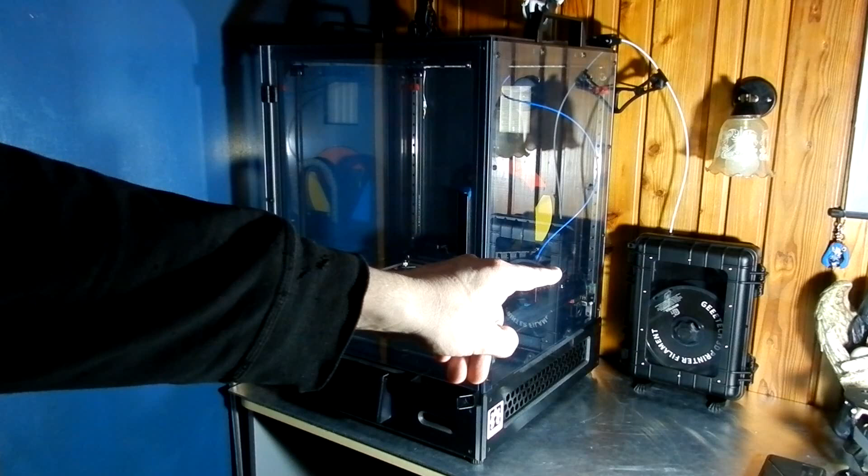So I just want to do an update on my printer and some things that I've changed on it and added to it. I have done about 1.5 rolls of filament through the machine now and got it going pretty good. Parts coming out to size, and designed that filament case which is sealed and has the tube going up to the top all the way.

A few things that I did was make a cover for the screen. Just clips on using the SD card reader. Because of the brightness of the screen, it only dims so far and it's still too bright. Another thing I did was make a holder for the touchscreen pen, because I just about lost it and threw it out one day.

I have installed extra screws in the sides and down the back and down the bottom, because when I got the machine, when it heated up, these panels would bend out from the heat. That was on both sides and this piece, so I've got an extra bolt there. Bolts down that side as well. I've bolted the top on as well. There's 3D printed brackets inside here to hold these bolts.

That's a 3D printed bracket for the sensor, because that was flopping around and making ticking noises when it was retracting and hitting this piece of pipe.

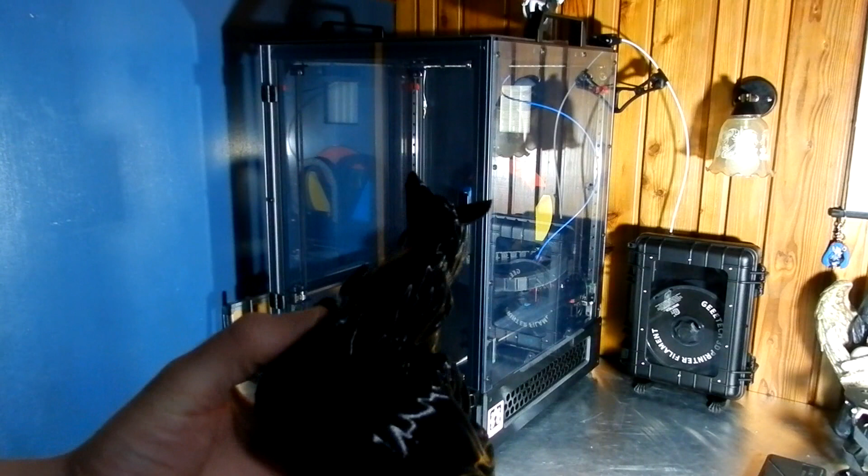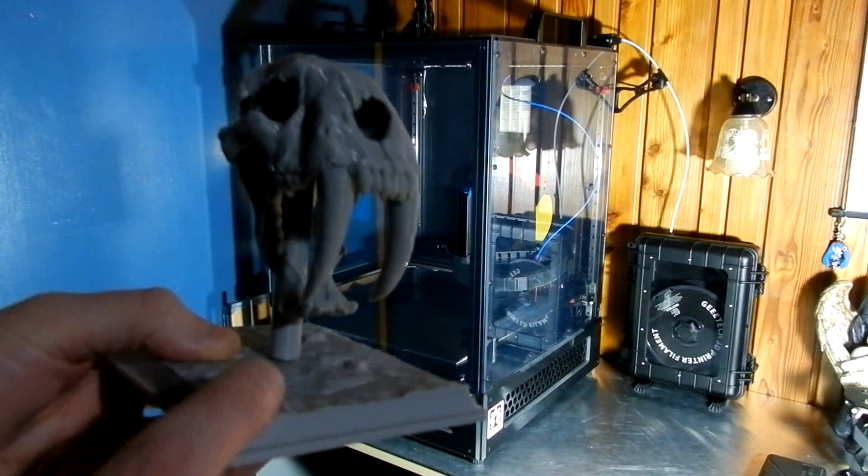Highest print I have done is 240 mil so far, and this one was printed with the roll of filament that came with the machine. So it came out quite nice. Nice and smooth and shiny. This one was printed with a different brand of filament. And it came out really smooth and shiny.

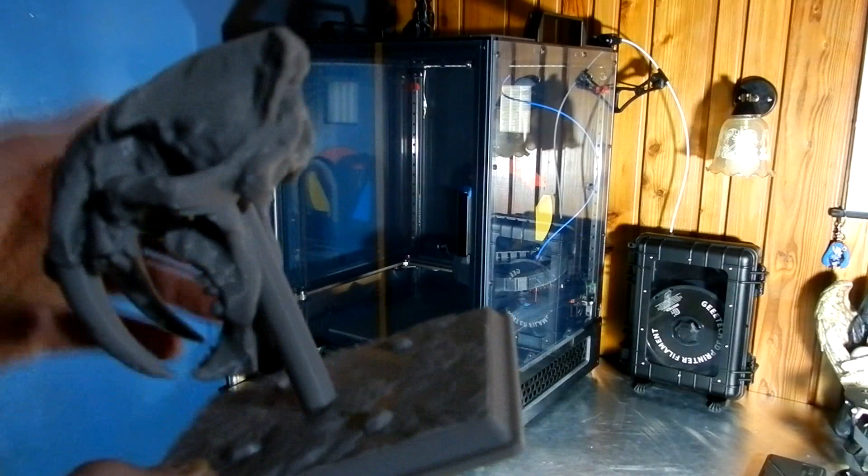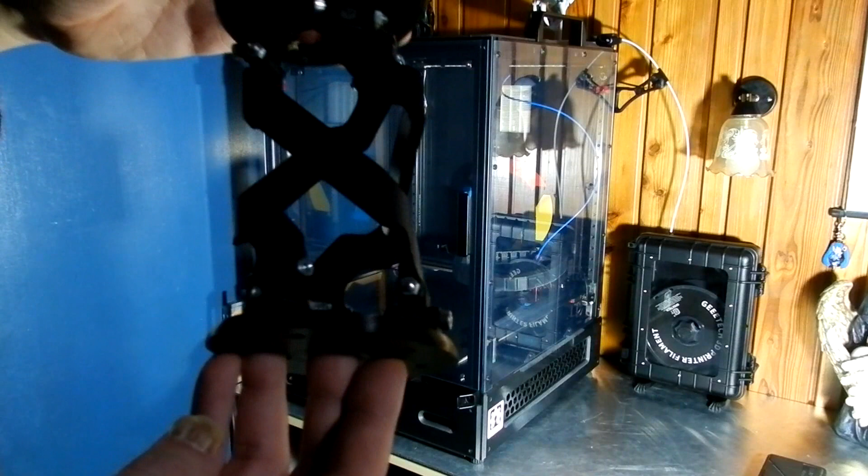Custom base. First layer comes out real nice. Just fingerprints. This was done in 5 pieces. Have done other prints and other little parts, like this was with the filament that came with the machine as well. So it's a linkage system. As well as printing all the brackets and stuff inside that and the feet.

And I originally had another bracket coming off here with the filament here before I'd made that, because you can't load the filament onto the machine if you've got this just about touching a wall, because the filament loads from the back onto the spool holder. So I had it sticking out the side, which was easier to get to. But then I had problems with moisture getting into the roll of filament, so I put it in there.

Wi-Fi. I had problems with the Wi-Fi when I first got the machine. It was either because my password was too long or the router that I was using had a problem with the machine. I just couldn't get it to work, so I ended up upgrading the modem and putting a shorter password, and it's working fine now, so I can print files without the SD card now,

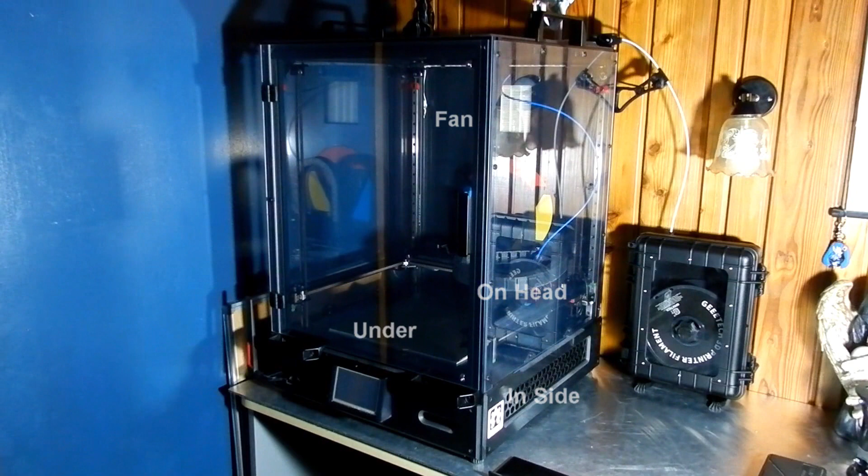If you're going to have it in the same bedroom as you sleep in, you probably won't sleep because of the fans in it. Because there's 3 fans on the head of the printer. Two of them's pretty loud, but all of them going is real loud. Plus you've got the 120mm fan in the back, which I never have running. That's really loud. I may end up looking at replacing it with a more silent fan, but I've never used it anyway.

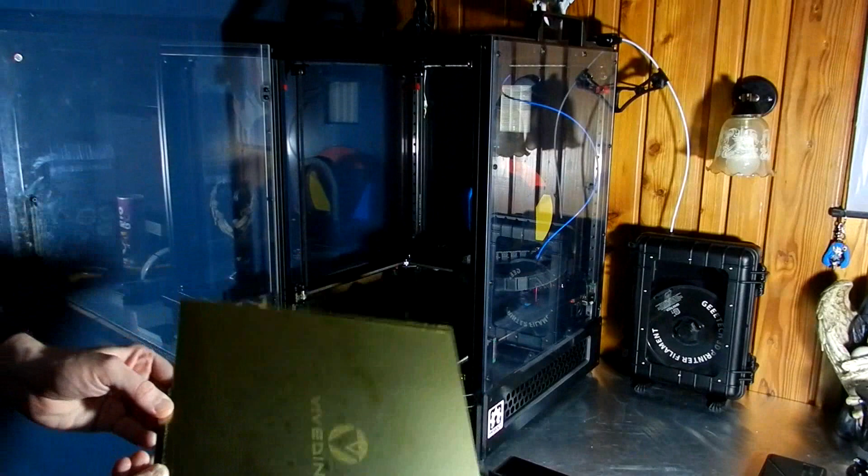At the moment I've only done PLA. I want to look at doing some other materials at some stage. The bed is real nice. The removable bed. Flexible. Prints come off real easy once the bed is removed or cooled down. Even with the machine just cooling down, the part will just pop off the bed. You don't have to take the bed off. It can be a bit of a mission to get lined back up.

Okay. The bolts you can get from OpenBuilds, but you can't get this series 30 T-nuts. I ended up buying a pack off eBay. But the bolts, low profile bolts, you can get from OpenBuilds. Or McMaster-Carr, I've seen them on there. Don't know what the prices are like compared to OpenBuilds. But I've got a big stock of different size bolts.

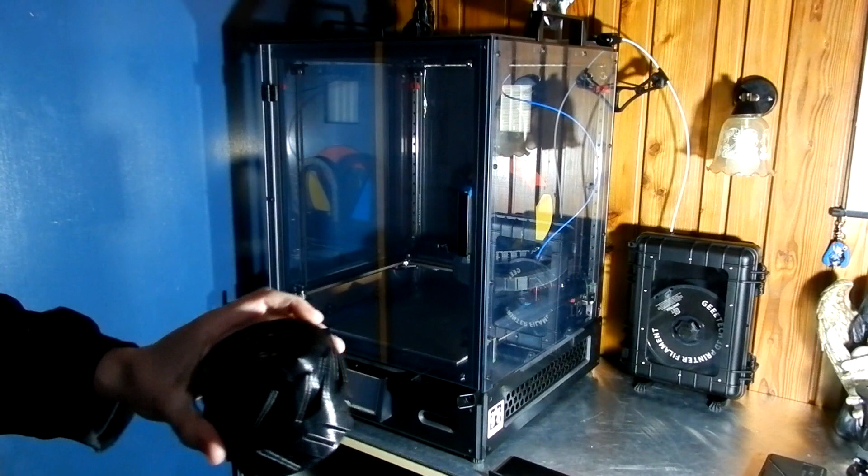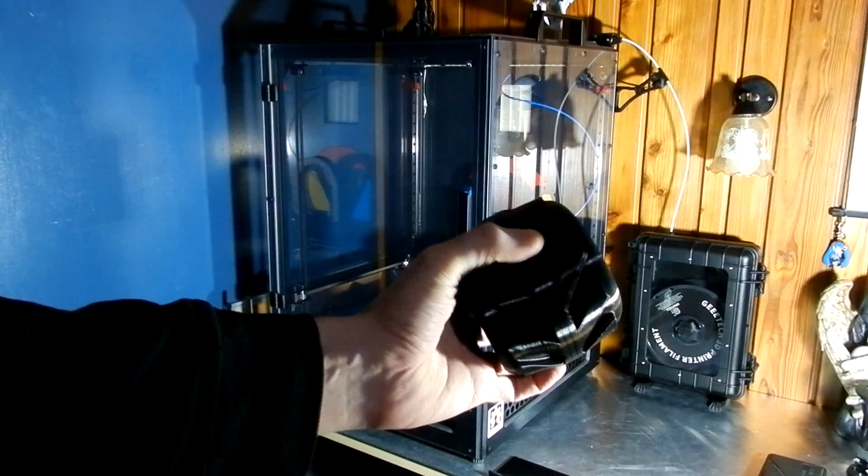And this was another print I did, a robot wheel. This was one piece. Bearings pressed in.

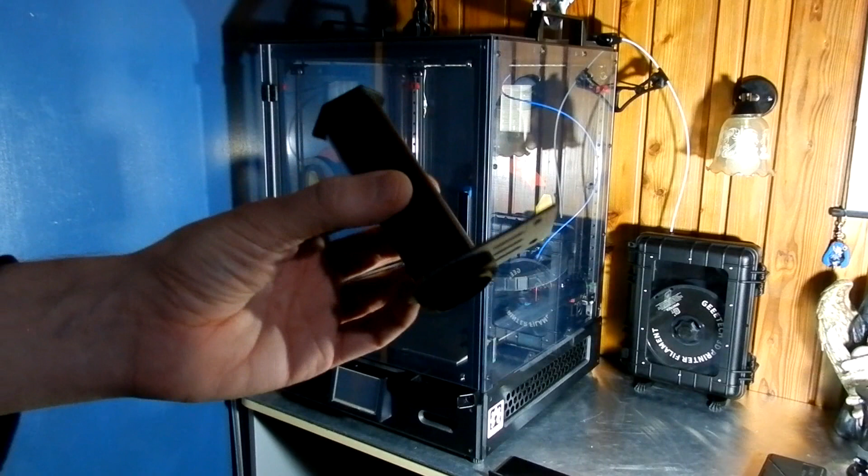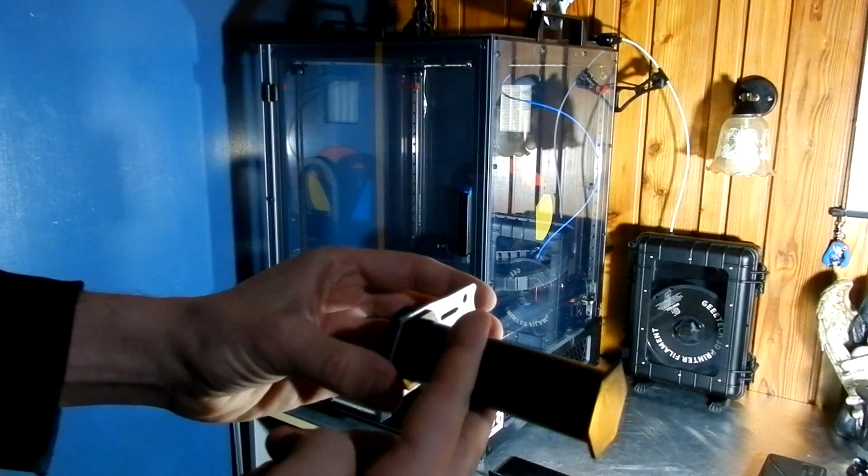This is the original bracket off the machine for the filament, so it went that way around on the machine, and that would be up against the wall, so you couldn't load the filament on, so I ended up rotating it on the machine to that way so you could put the roll on, and then I ended up going to the case, so I've still got that if I need to use it or make something out of it.

I will show you some of the brackets and images of the brackets inside here that I did after this little video. And it's got a pen holder there. There's the Wi-Fi aerial. They got their logo down in there. You got vents through there. There is a fan in here, as well as another fan underneath sucking air up into it.

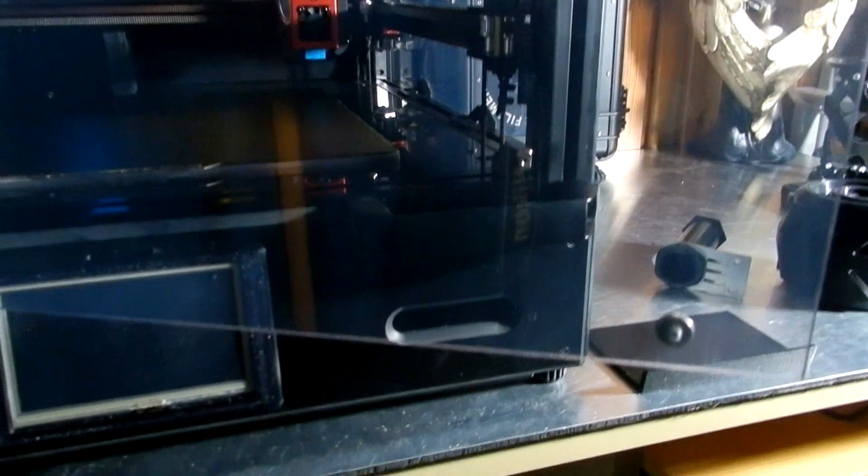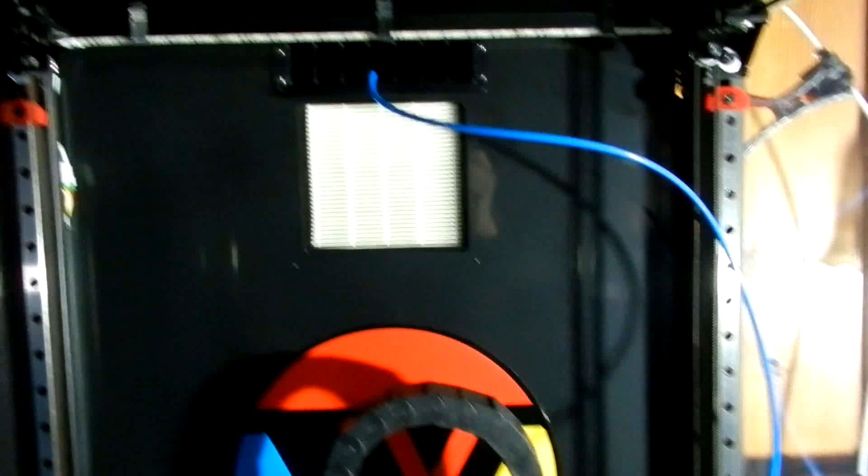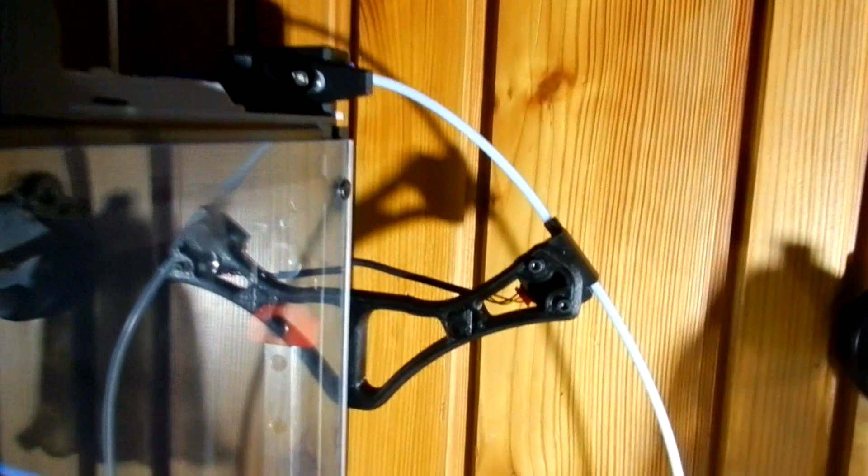Don't know if you can see that mark on the door or not. There you can, there. Yeah. Scratches on the door from the chain. Filter in the back, LED strip up the top there, plus I've got the moisture packs up in there in the corner.

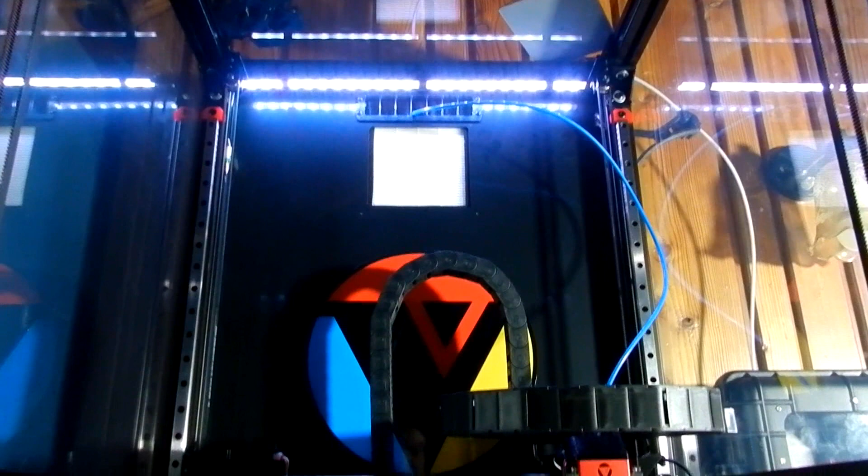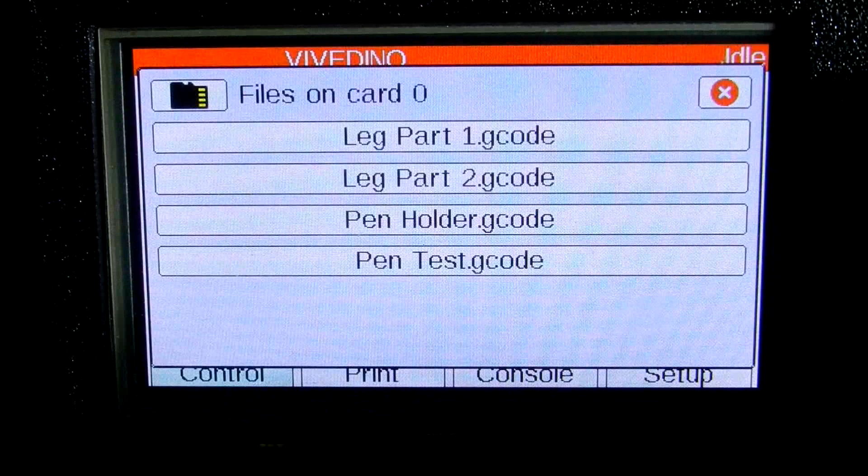That's the main screen, so you got all your home positions, load from SD card, move the machine around, and there you can do it by different measurements. SD card, oh, that's showing the ones on the inbuilt memory, because there's no SD card at the moment. You can extrude and retract different speeds and lengths.

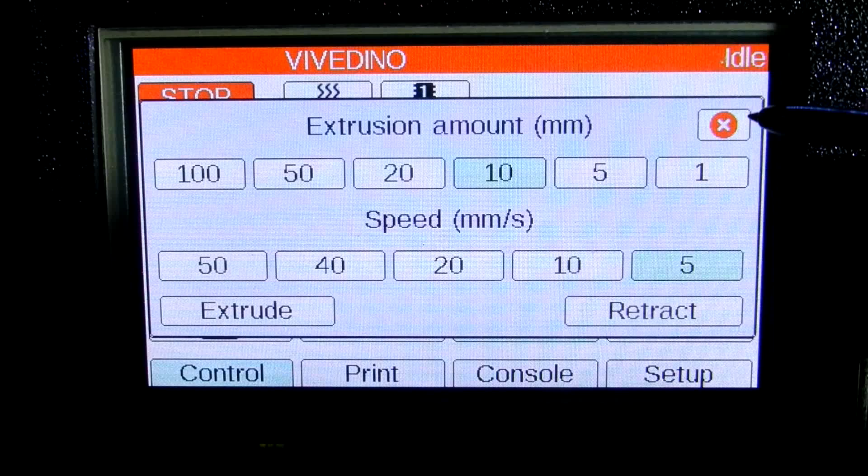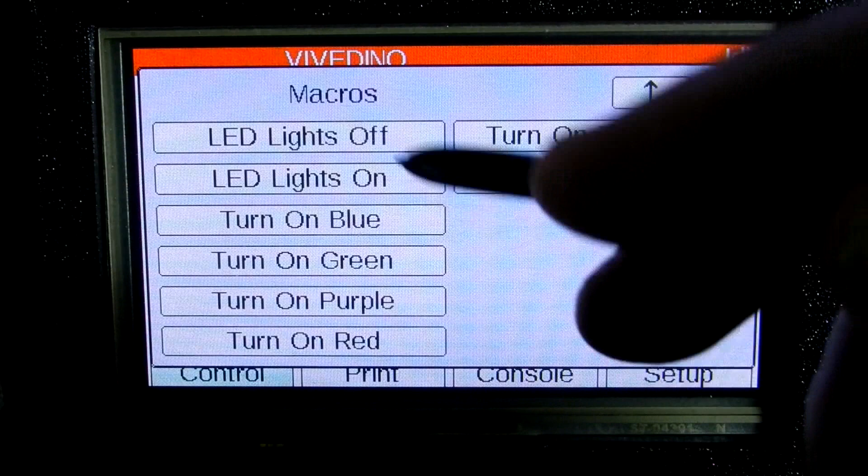Macro, all your different ones. LED lights is one I've added in, so I can turn the lights up to whatever colour I want or turn them off. Like if I'm wanting to sleep, I can turn them off and put the cover on the screen.

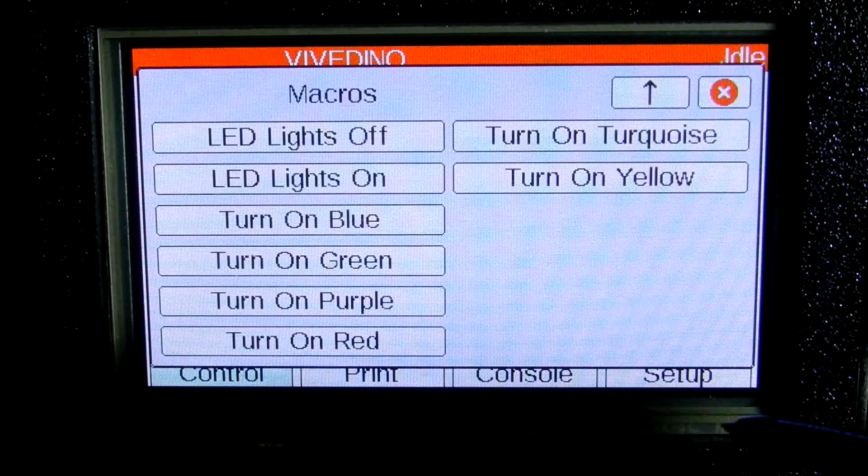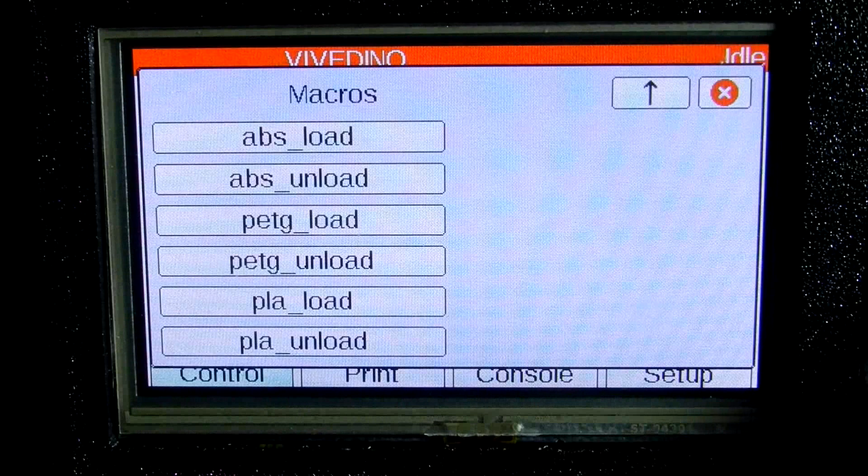Got your filament, which is loading and unloading. Had a problem with unloading once, and a piece of filament got stuck in the extruder. The piece that was in the nozzle was too big to go through the hole in the extruder, so I ended up taking the extruder off the machine and taking it apart to get it out. So I don't use these anymore. I use the load options, but the unload I do manually.

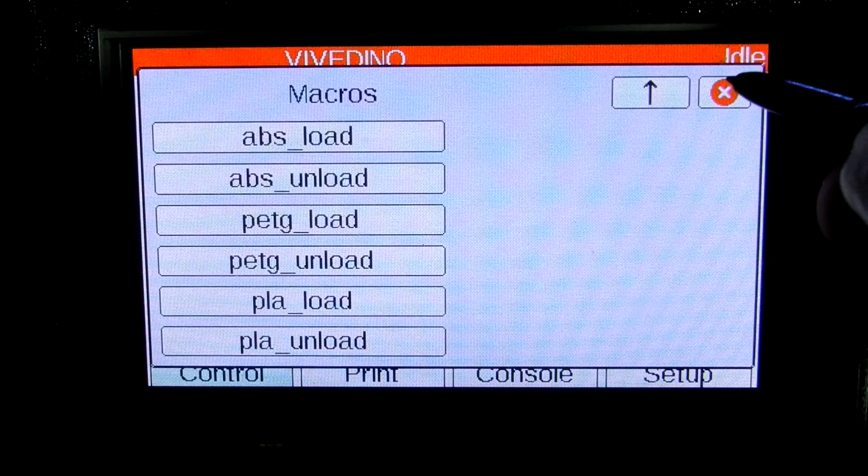And unload it until there's about 20mm left before it goes through the extruder, and then I just cut that off, cut the blob off, and then put the tube back on, because I don't want to have to be taking the extruder apart again.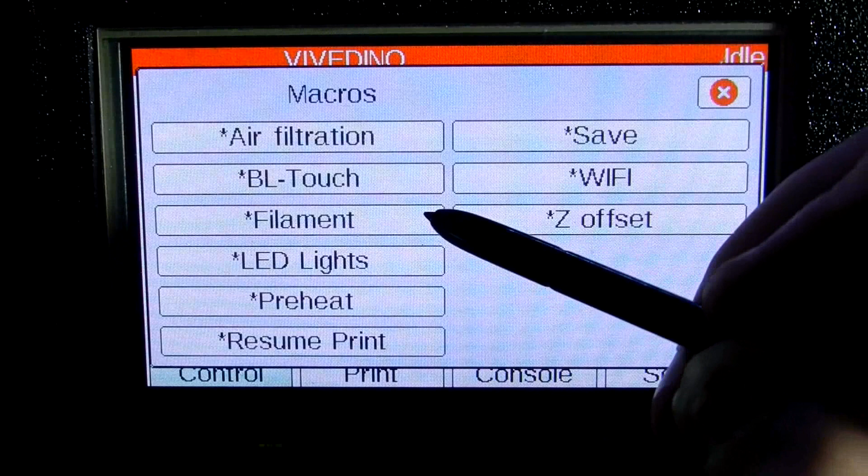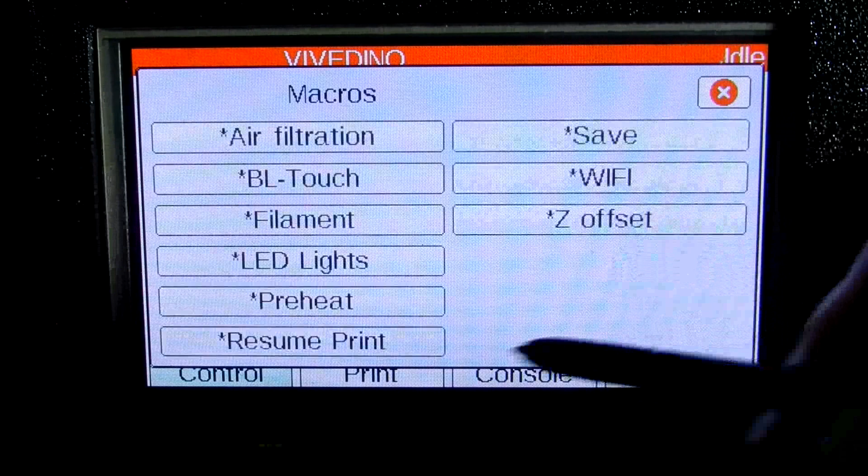Preheat options, Wi-Fi, there's a few other things in there. Turn your fan on and off at the back, BLTouch, resume print. Haven't used that. Haven't used save, haven't used offset. Leveling. Turn those off at the moment.

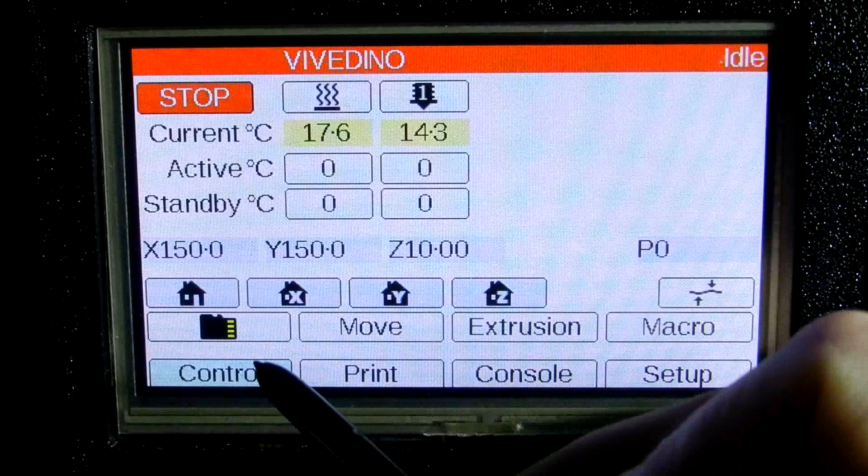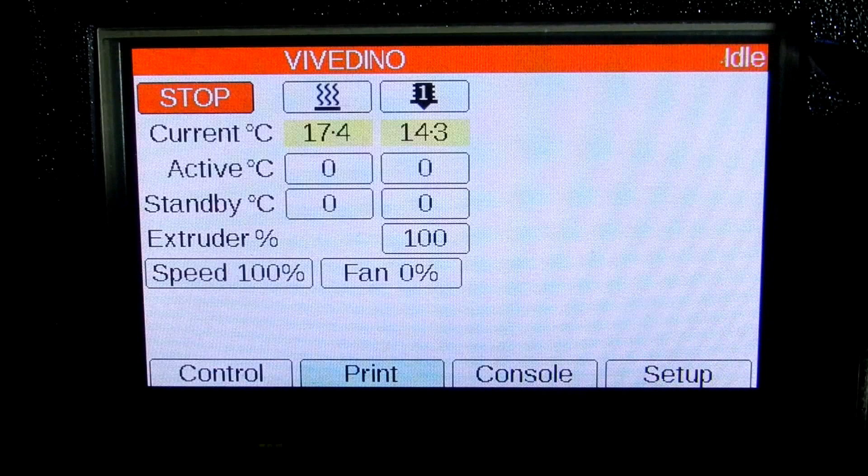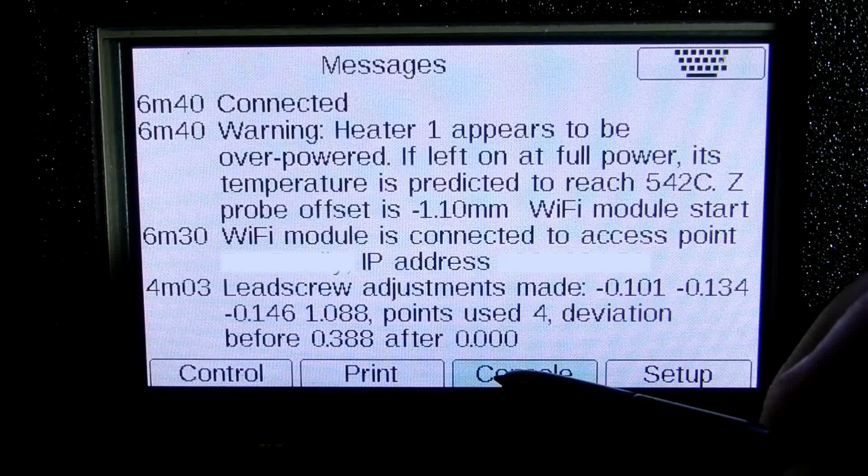Print. Normally that comes up with a bar across there for your printing time and times. And it normally says printing up here. Console is just information and stuff. And setup. Haven't done anything on that screen apart from check the brightness. I turned it all the way up.

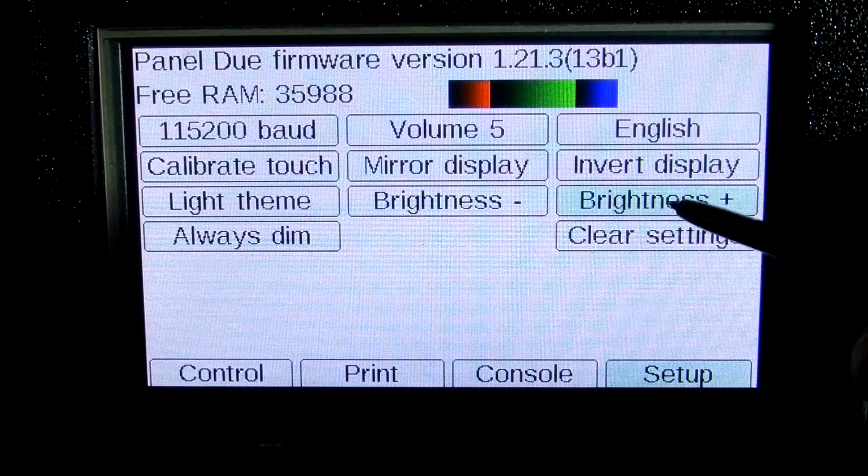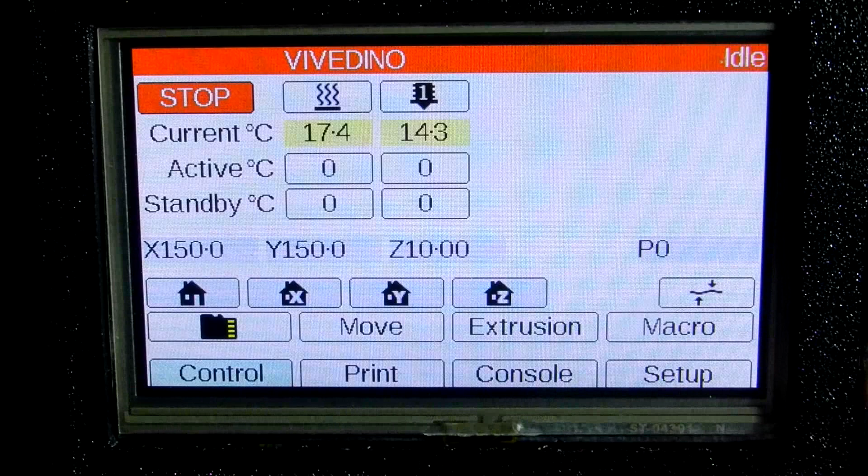That's about it on this screen. Where is it? Oh, you can't see it. The BL touch is just in here, behind here.

LED lights is not included with the machine either. That's the extra menu that I put on the machine. It's the code that you type into the console to turn the lights off. And that is the one for typing in the G code if you want the lights to not come on.

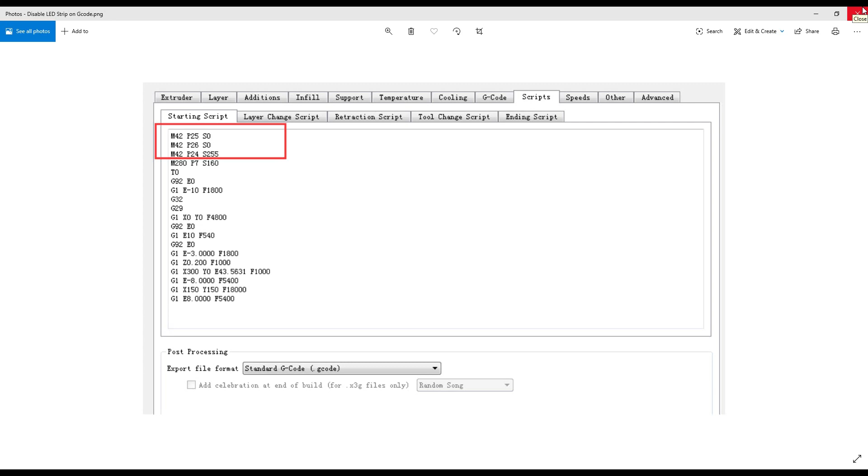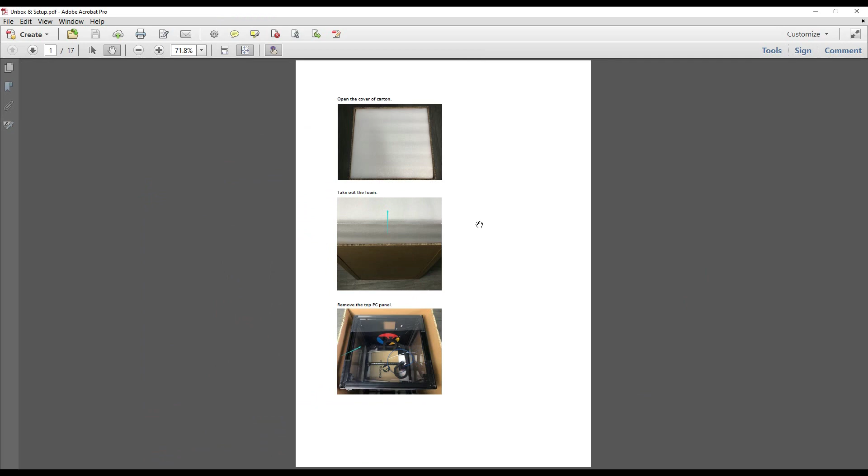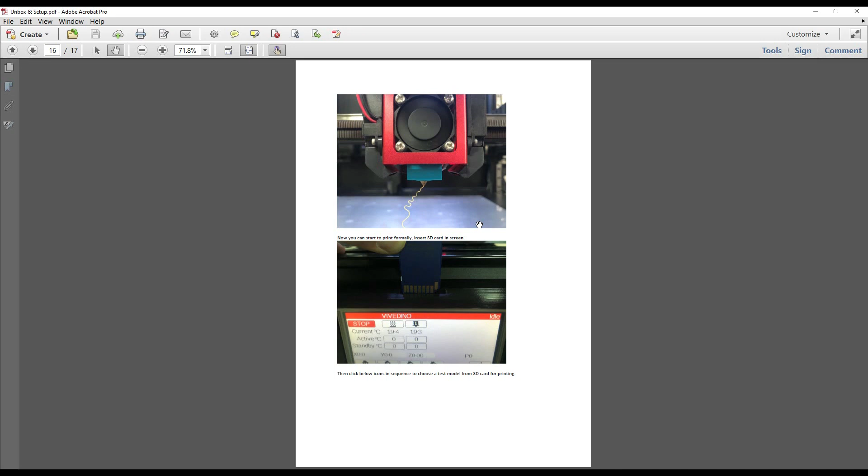Manuals, pretty basic manuals, setting up the Wi-Fi, unboxing, and that I don't think is included. No, it's just a copy of their website I downloaded. The unboxing is pretty simple. Connecting the fan up, the wires and all that. Basic settings, loading filament, loading a file.

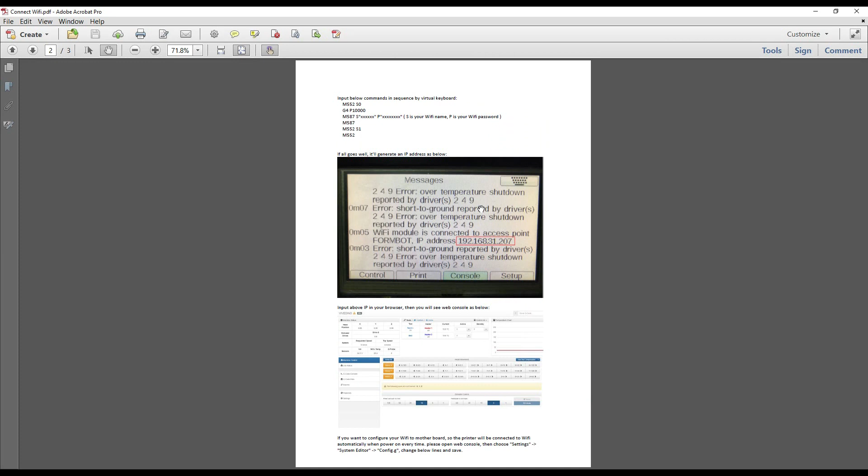Wi-Fi is pretty easy. Doing the profiles is pretty easy as well. Tells you everything what to do. And files, these are ones I've designed.

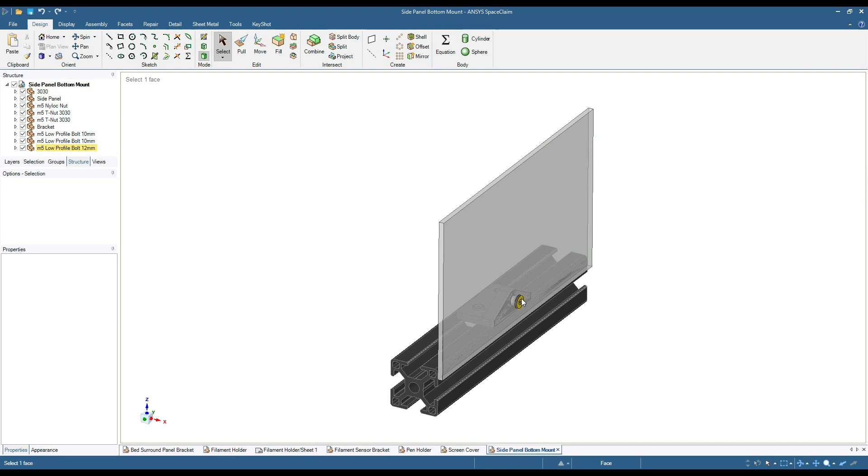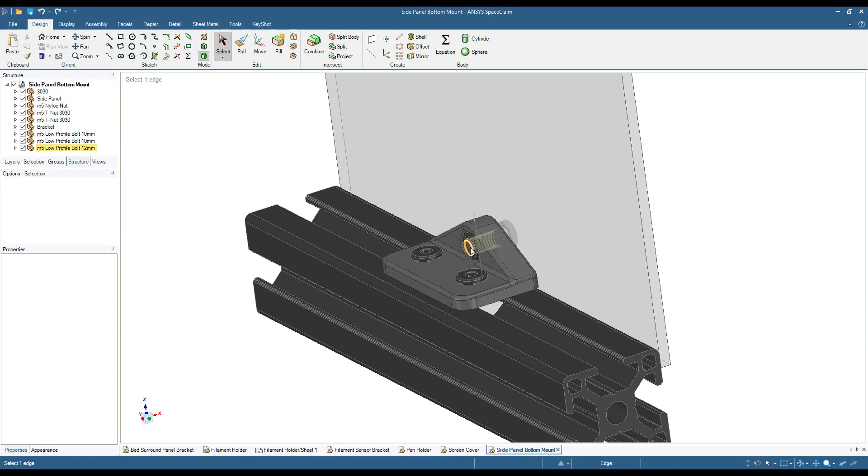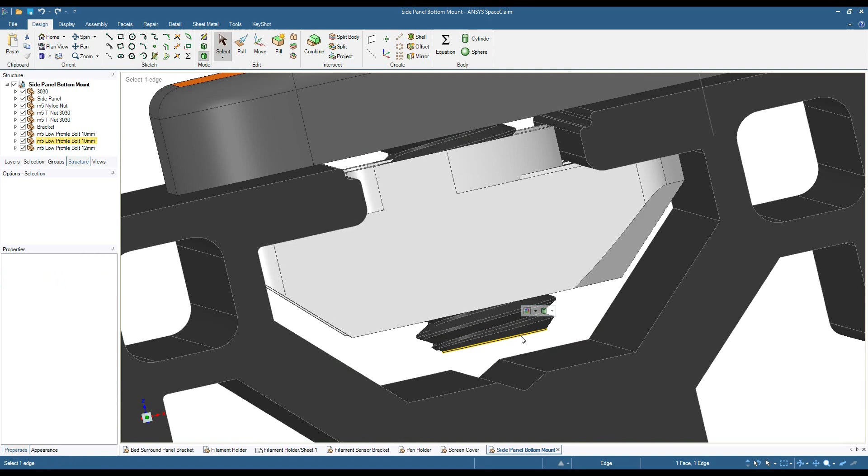So this is the bottom of the side perspex, the bolt which goes into this frame rail, because there's nowhere to put a bolt into the side at the bottom. So I designed this bracket up, holds a nut inside there, and a short bolt. That bolt is a 12mm long, and these two here are 10mm as well. Yeah, 10mm with the T-nuts under there. Actually, they look longer. They look like 12mm. Yeah, they are 12mm.

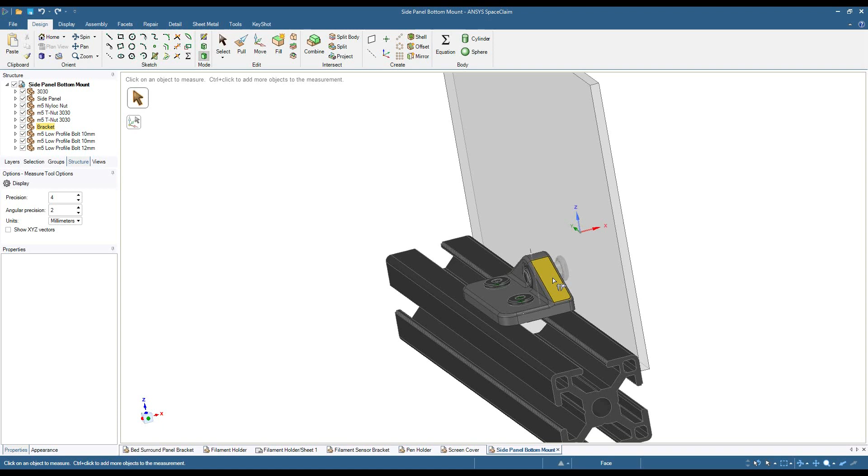So I printed 4 of those. So there's 2 on each side at the bottom, and the low profile on here and here, because the home sensor has to pass through here quite close to it on one side of the machine.

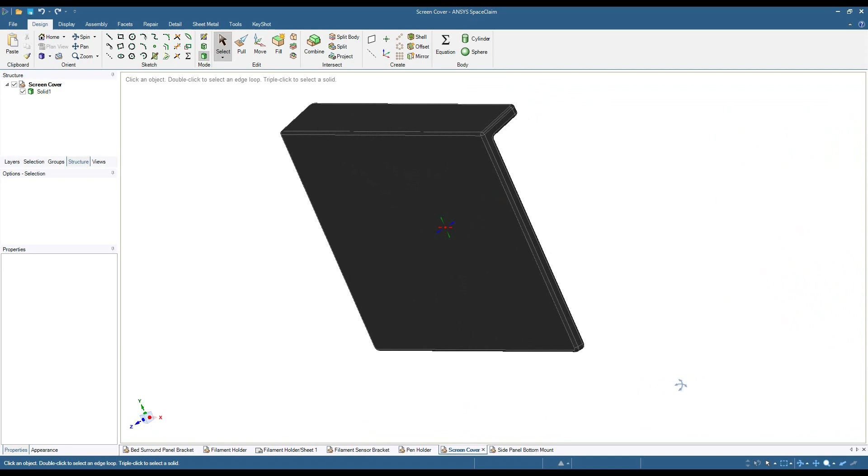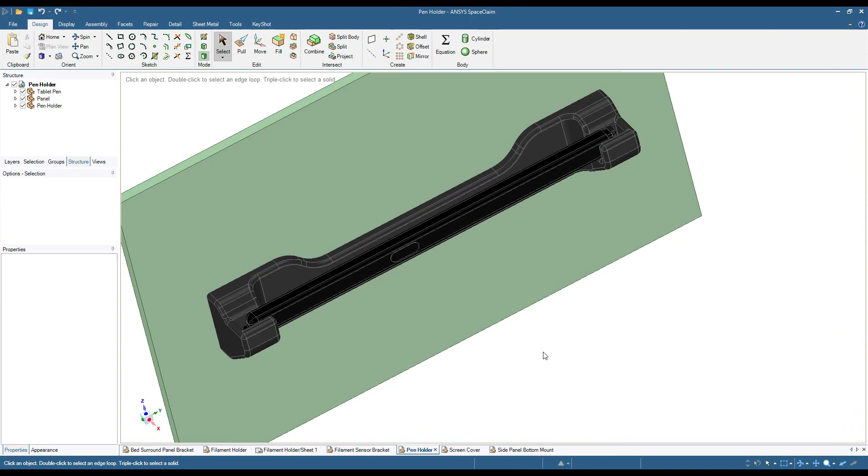Screen cover just looks like that, angled, as well as this piece up here to hook into the card slot. Maybe you can do a design on the front, but I just left it blank. Pen holder. I'm actually using a Samsung Galaxy 10, I think it's a 10 pen on mine. I had a spare one. And this bracket is double-sided taped on using automotive tape, double-sided tape.

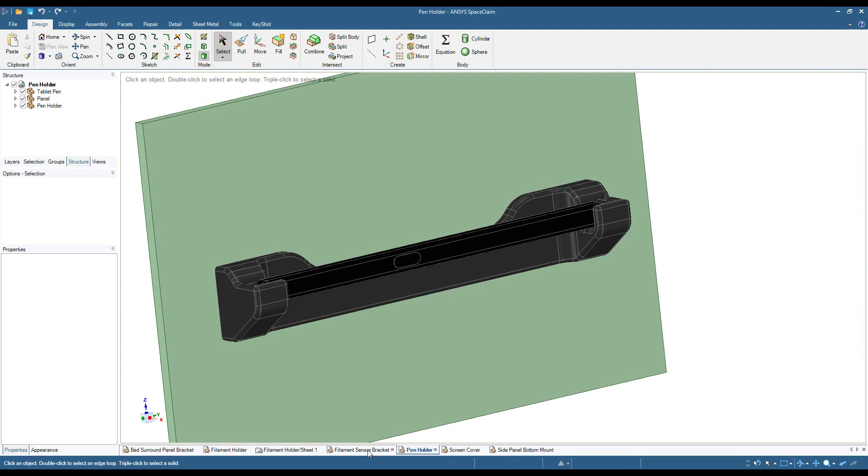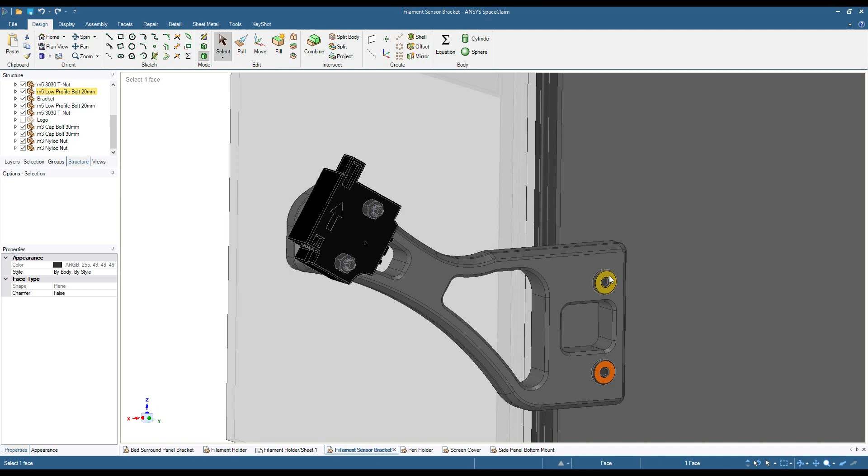Filament sensor bracket has got the sensor mounted on. I chucked the logo of the machine on there. Bolts on there, using the low profile bolts, and they are 20mm long. Those are M3 bolts, and they're 30mm long.

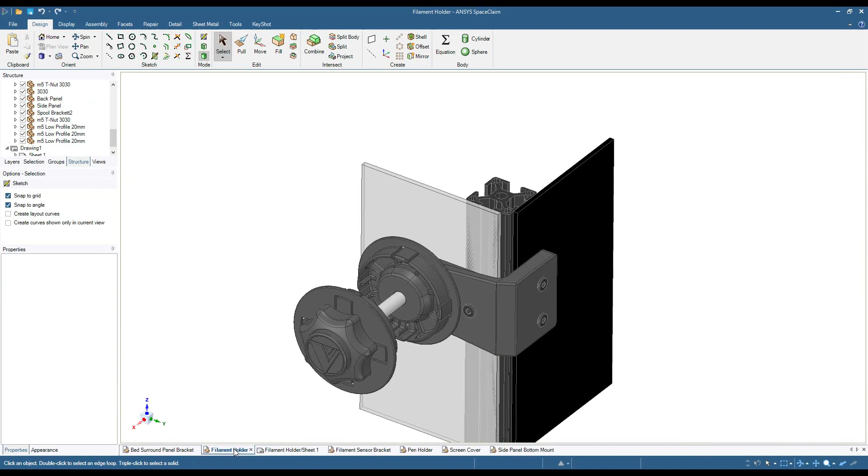Close that one. This is the bracket that I made on the machine to have the roll on the side of the machine, instead of out the back where I couldn't load it without moving the whole machine. And these have got a bearing in them and a nut inside the knob. I had a couple of versions of it in here, so there's heaps of knob.

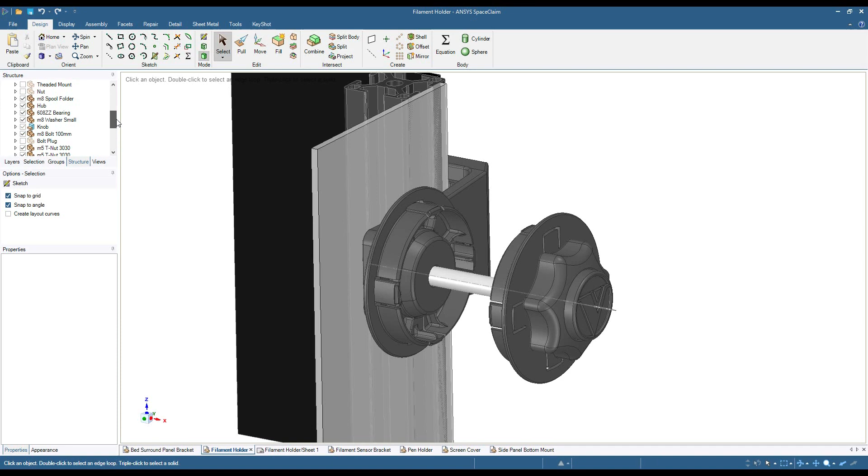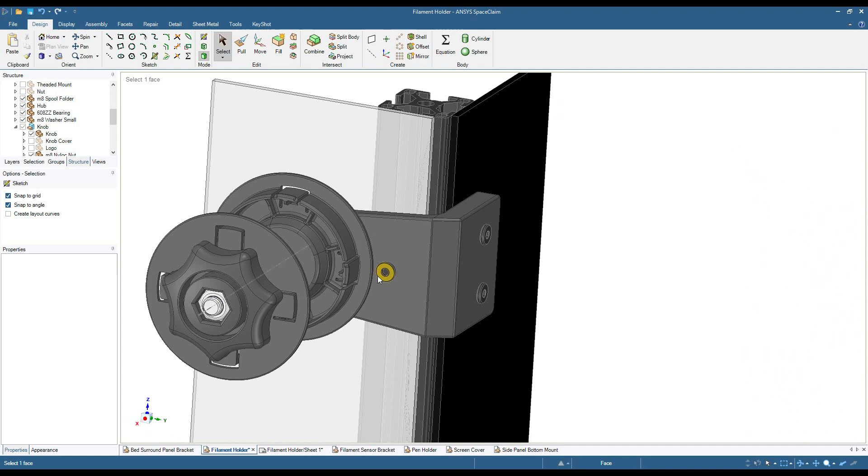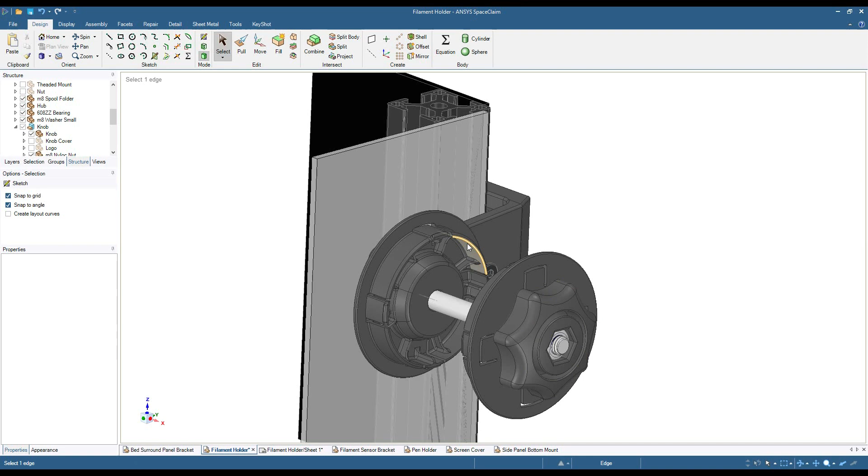Take the cover off, and there's the nut inside there. And 2 bolts through the standard mounting holes that were on the machine. And that bolt I never actually put in the machine because I only had this on there temporary. And the bolt just goes through the back there. That system worked really good, but I was having problems with humidity and moisture getting into the rolls. So I did away with that into a sealed case, and it seems to have fixed the problem so far.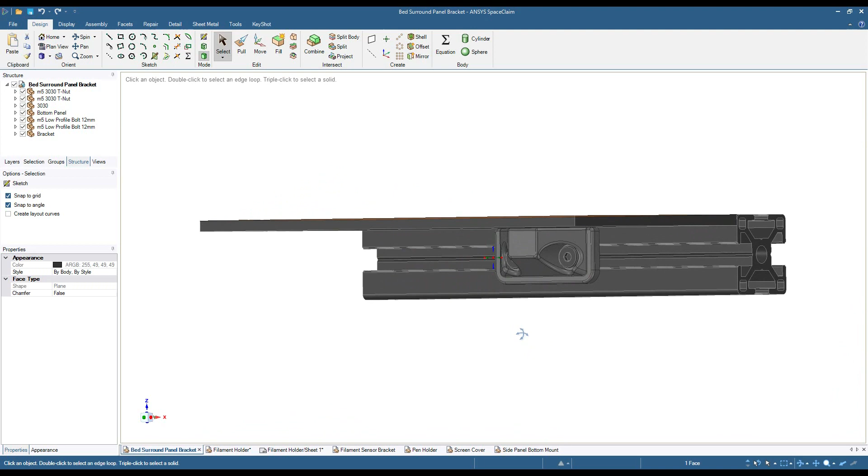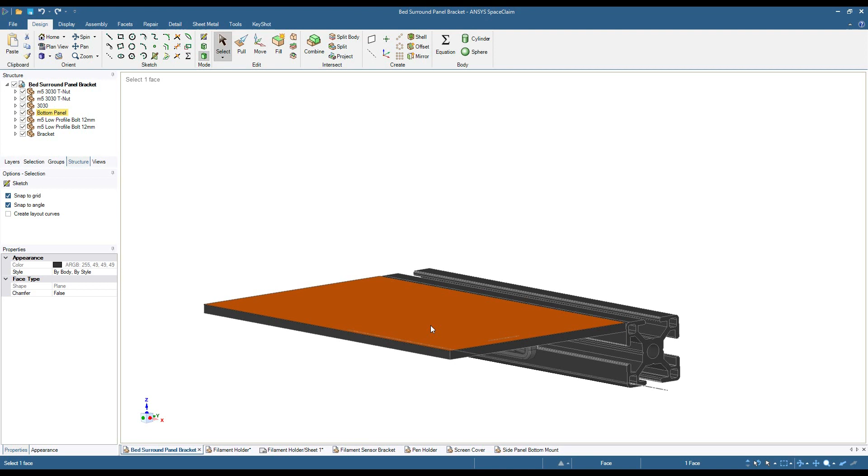These ones, this is the plastic around the heated bed, which was sagging at the front and back. So I did those brackets which the board sits onto. T-nuts in there. You do have to take the 4 screws out of each corner to lift this board up, as well as a little bracket at the back which holds the cable chain. Easy to do, and you just put these in and then put the panel back on. No screw going in through the board or anything, just sits on top.

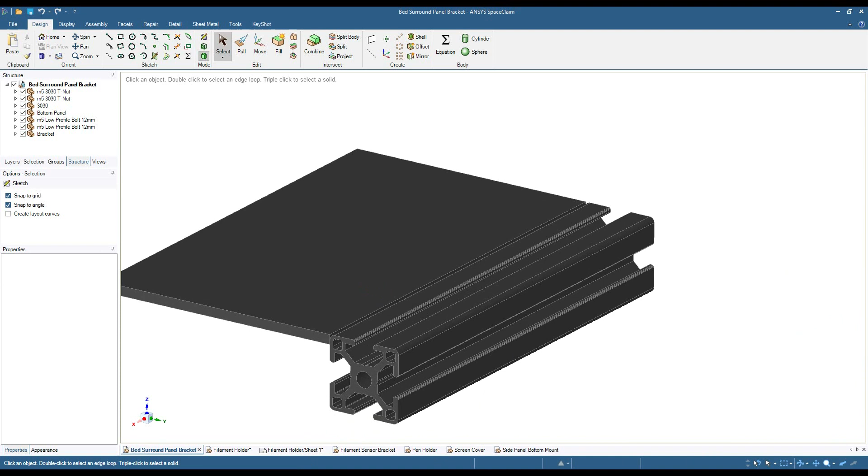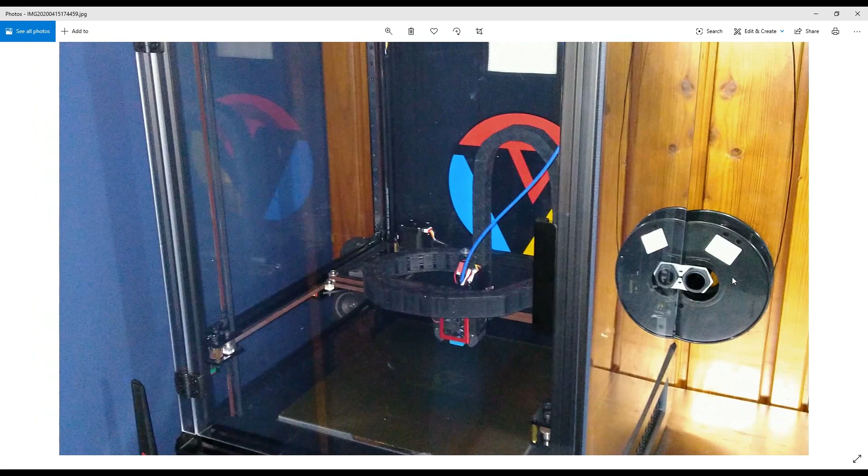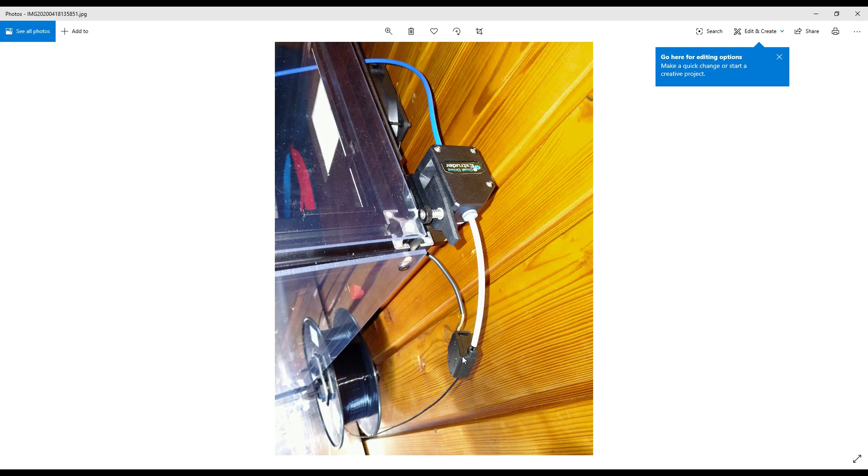I may have a picture of it actually. So there's the standard filament holder. As you can see, it's up against the wall. So when I needed to change it, I had to twist the whole machine on an angle to get it off. It's the setup, stock setup. As you can see, this moves when it retracts, and then it extrudes and taps on this hose, making a tapping noise all the time.

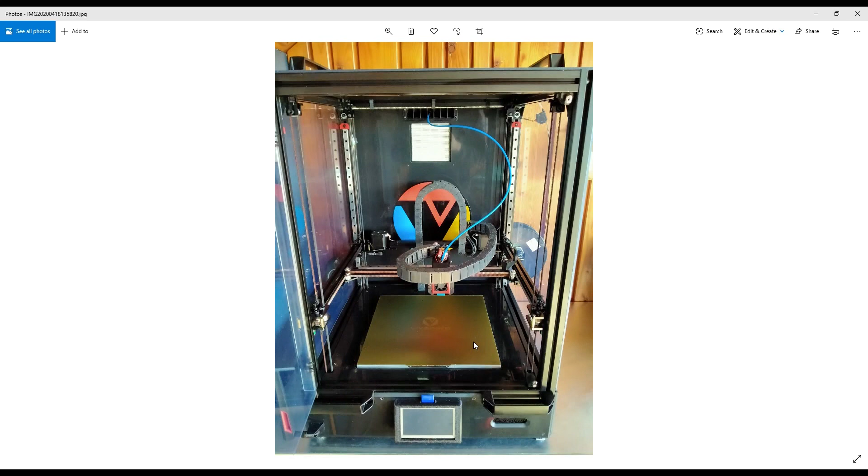Screws that you'll need to take out is one there, one there, one there, one there, and there's 2 up on this bracket which is in here, which is just sitting up against this chain so it doesn't go that way. If you take that bracket off and these screws, you can raise this up enough to get the little brackets in underneath.

And that's when I was using the card reader when I had problems with the Wi-Fi. Had no problems with the machine apart from noticing that it was skipping a row of probe points on the bed level. And yeah, so that'll be the next thing I'll look into, see why it's skipping the row.